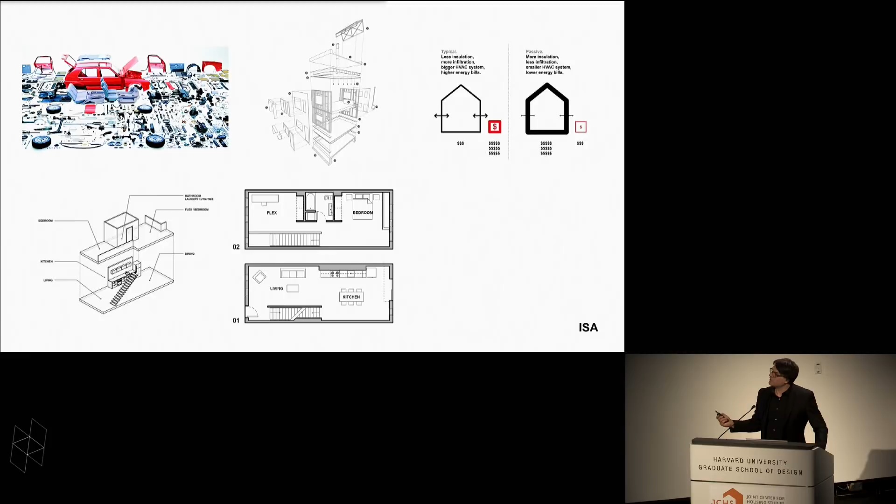Super energy efficient, which isn't going to be the point of my talk, but one of the things I just want to point out is this house had two doors, the bathroom door and the front door. And so this whole idea about are there new ways of thinking about housing that are small and simple that can control costs and frankly also create spaces that people want to live in.

And then we started to realize that Philadelphia is a funny town. It's got 440,000 row houses. No other city in America quite stacks up like this. Baltimore is sort of similar. There's this democracy of the grid where whether you're rich or poor, you probably live in a 16-foot wide house, which creates this common sort of challenge for living. And I think we're finding ways to exploit this.

So I'm going to take you through 3 different quick projects that talk about 3 different ways that we operate in this fabric. Just real quickly, Philadelphia lost a lot of population since 1950. It's on the rebound, resulted in a lot of vacant land. So that's part of what we're now working on. And one of the things we do is we infill single lots.

But one of the things we learned here was this idea that the outside of the house didn't have to be expensive. And in fact, on a row house block, the sidewalk in the street is actually the living room, and that this arms race for facade curb appeal on a lot of projects we're seeing is almost a misplaced investment. And so our idea with this was about core appeal, which was put the value of the house inside.

And for basically the price, actually a little under what a lot of people are building these starter homes for in this neighborhood, people are able to live in what feels like a very sort of generous space where the value is in the kitchen, and the bathrooms and the stairway, which is the stuff you touch as you live in the house. So just rethinking the way we're spending the money was a sort of lesson here.

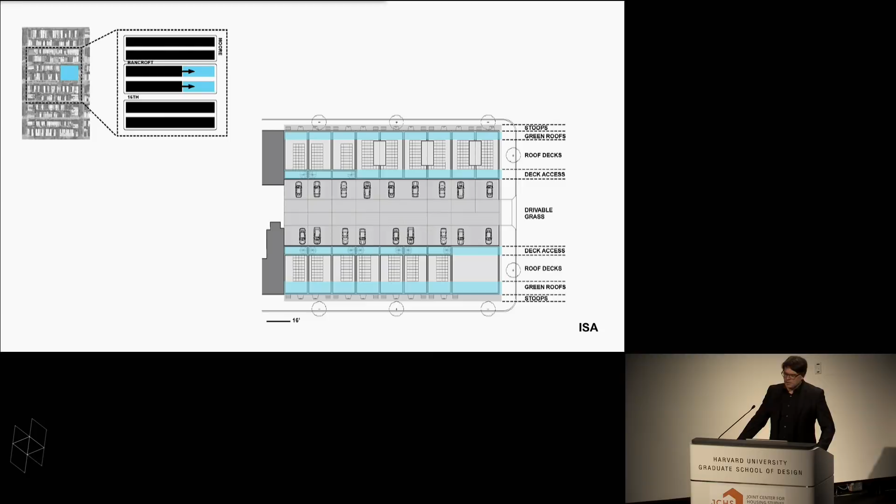The vacancy of Philadelphia sometimes results in big pieces that are missing. And this next project resulted from the demolition of an outmoded school. You can see here on the top left, basically the diagram was to continue the row house fabric. Sort of parking in the middle of the block. That was all turf paved, so it's also an outdoor recreation space.

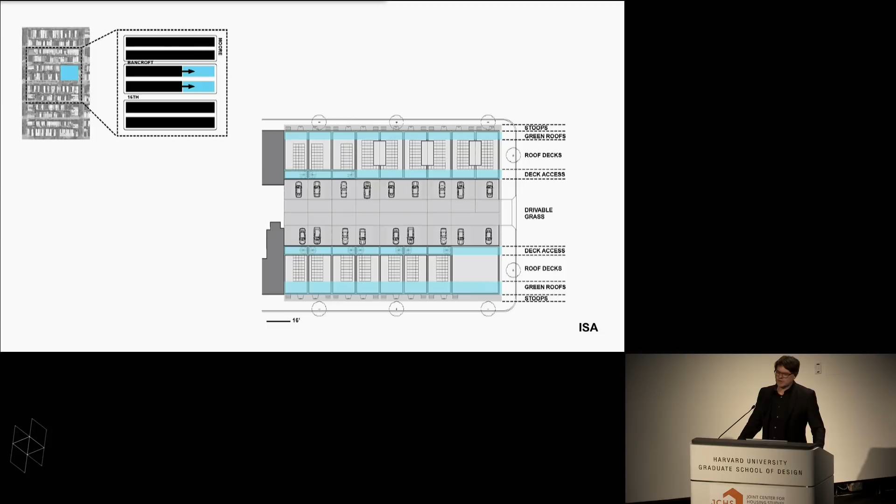But one of the things we've been using, if you think about this as 100K growing up as far as scale, this is a combination of condo flats, 3-story and 2-story houses. The 2-story houses sold in the upper 200s, which in this market was a pretty remarkable number. Still hitting about that $100 a square foot.

You can see the simplicity of, and I apologize for the sort of slightly blown out floor plans there with the contrast, but very simple cores, very simple interior layouts, and really hitting a kind of green performance level that is also putting some money back in people's pockets instead of to the utility company.

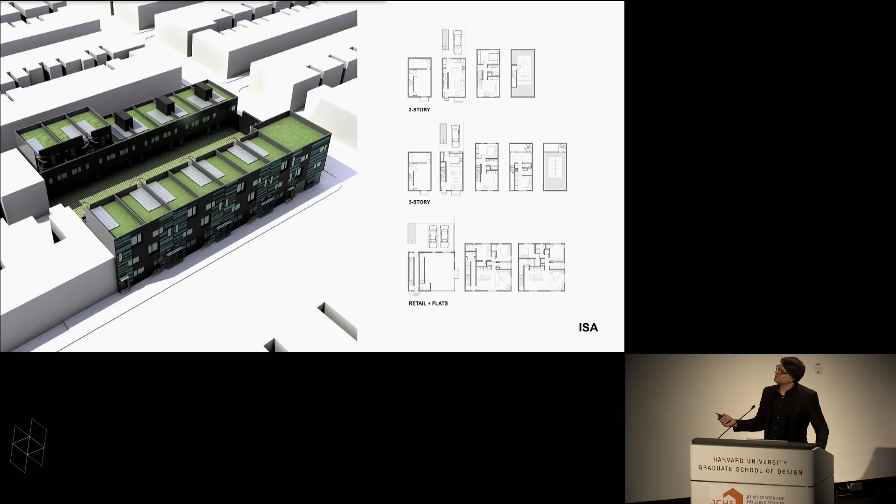But this developer was really struck. He was very worried about the cyan-colored facade, saying this was going to stick out in a funny way. And we said, no, trust us. It's South Philly. You'll never see it. And I think in a way it's kind of true. It actually created a kind of animation in the way that the existing houses do, and the neighbors were extremely embracing of it.

So this is my favorite category, the leftover category, and this is what happens as a market matures and all of the easy sites are gone. And now developers start turning back to what are the sites that are hard to develop. And I think this is a lesson we've been learning about how maybe the architect can unlock interesting value.

So this was a 20 by 100 foot lot under the elevated train, which I would say it's a corridor that 3 or 4 years ago was not a place most Philadelphians wanted to be after midnight. And the developer came to us and said, it's right on the train. I'm really worried about whether people are going to want to live here.

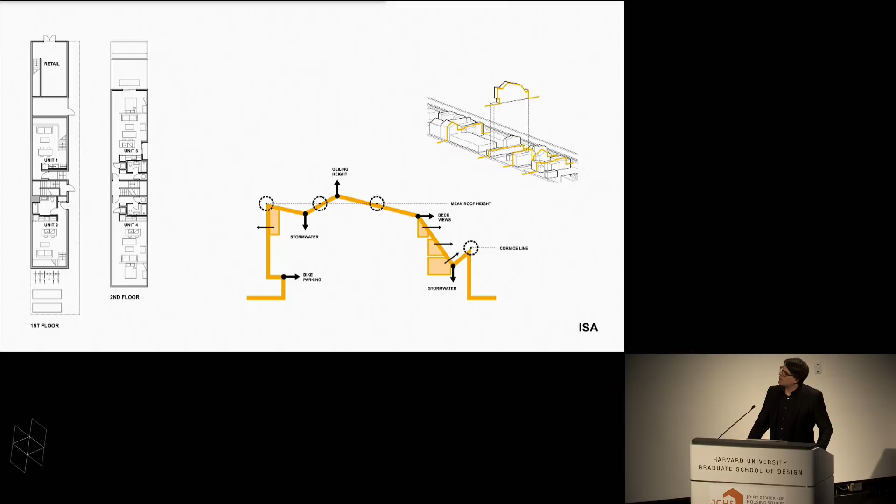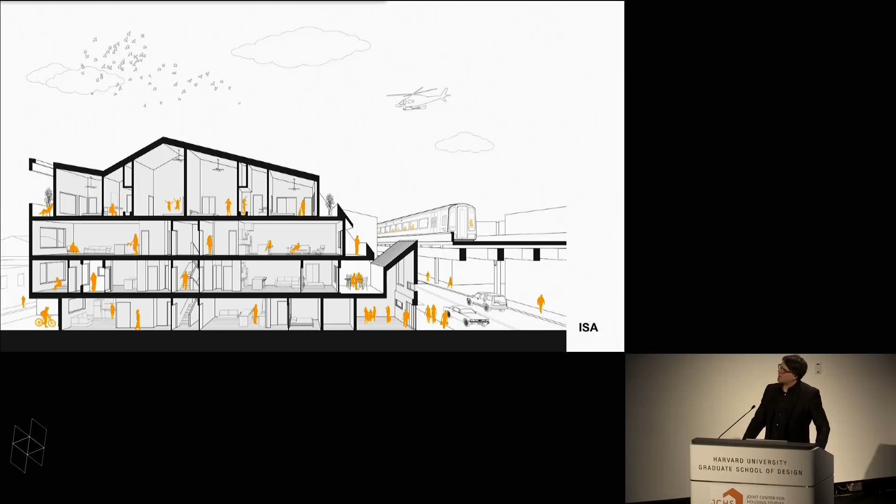And here you can kind of see the relationship to the train. And you can also see on that upper level, there are these sort of volume spaces that allow people to experience the roof line that is interesting and dynamic. And you can see the sort of terraces that are revealed - that's one on the back. You can see what it's like to be out front there looking at the train go by.

And we've now done a series of projects along the train that are frankly being built on pieces of land that are still affordable, finding ways to maximize the number of apartments and places to live on those lots. Not to make them feel marginalized, but frankly, this corridor, we do have a habit of gentrifying corridors a bit, in the sense that lots of people want to live on this corridor.

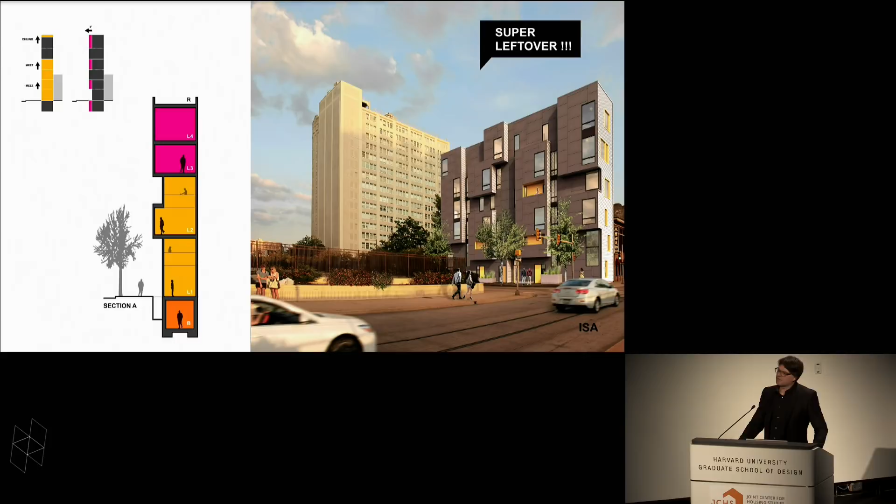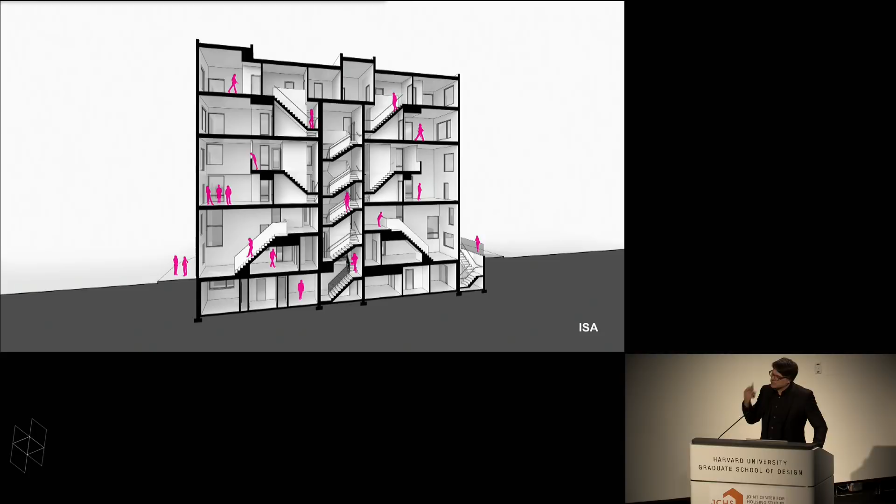I want to make 3 points about why I think Philadelphia is generating these projects. One of them is this idea of small batch development. I think one of the things we're going to hear about today is volume is important, and I think that's true. A lot of cities are tens of thousands of units behind on affordability.

But one of the things we're seeing is that small projects - both of these projects, the banker, the lawyer, the developer are all sitting at the table and everybody gets on board with the project we're doing. And the financing, there's not distance from the project on things like financing and some of the regulation, that everybody sort of gets on board, and I think that allows for some interesting risk.

We've also become really interested in this idea of what we're calling lab cities. It's interesting, we're working in Detroit and Chicago, and if you look at them statistically, they're sort of similar to Philadelphia. My last slide will sort of point this out, but I don't think cities sit in the lab zone forever. But I think when they're in the lab zone, it means they're just affordable enough, and we think that's a place where there can be innovation. And we're now looking for other cities where we can contribute to the way that they're unfolding.

I just saw the stop sign. I'm on my last slide.

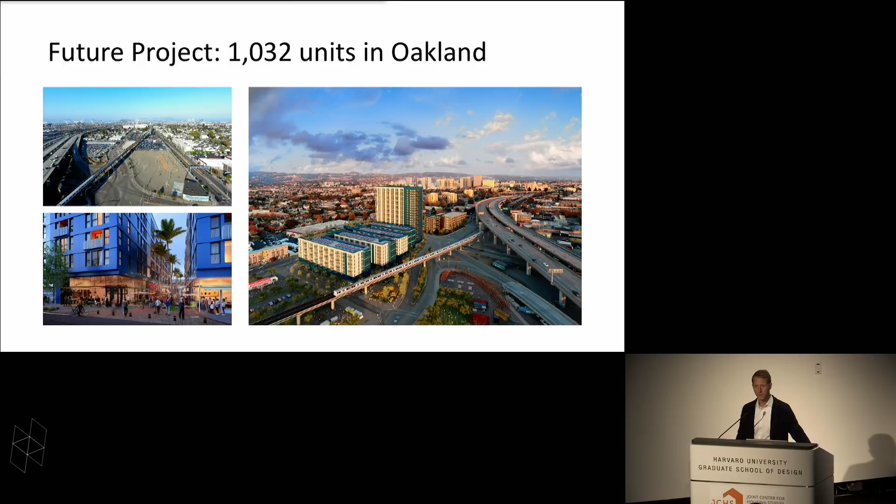So this will come as no surprise to the room. We have, in the Bay Area, added a little less than 700,000 jobs over the last 8 years. During that same stretch, we've added only 100,000 housing units. So there's this incredible shortfall of units, which leaves the regular civilians competing for housing with highly paid engineers working for Google.

Even the cartoon artists in town are recognizing the ridiculousness of the housing situation. On the left is how apartments have been used forever: 2 bedrooms, you get a couple roommates, a small family. Today, on the right, that's how they're being used. My personal favorite is the bed in the bathtub or the sleeping loft in the kitchen.

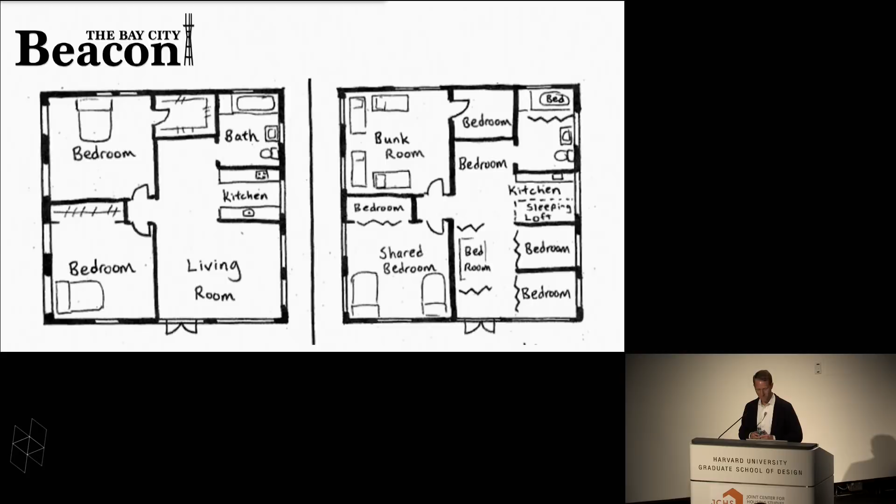But cramming more people into less space has been the market's response to affordability. Our solution and response is as follows: for us to continue to build housing that is affordable by design, it needs these 3 things.

The first one is building with no parking. Second, building with micro DNA. By that, I don't mean building teeny tiny studios, but having apartments that have the spirit of small. And third, having a standardized set of designs which can be adapted to be modular.

Next week, we are breaking ground on 200 units in San Francisco. We're going to have 650 residents, and we're going to have no parking spaces. The development immediately next door, similar in size, ended up building subterranean parking. We decided to build subterranean housing.

It costs us about $60,000 per space to build a single parking space. By not building any parking, we were able to add 17% more housing for humans.

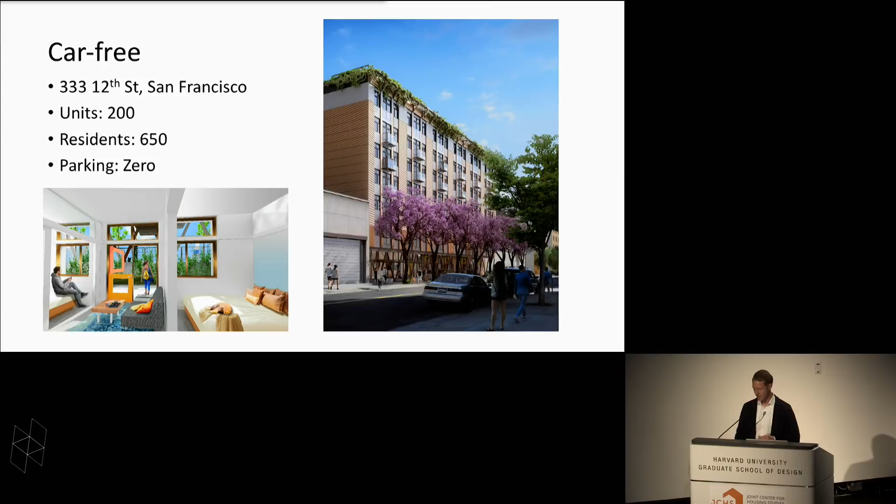I will say in San Francisco, it is no hardship not having a private car and a parking space. Most people that are moving to town are choosing not to have the headache of having a car. Certainly in the age of car share and bike share and scooter share, most people are choosing to not own the cow when they can just buy the milk.

The favored units in this building ended up being our 3-bedroom suites. Those units had the DNA and the spirit of a small studio, an efficient space, but we were able to have 3 bedrooms, a bathroom, a living room, a kitchen, all in less than 600 square feet.

Now, for us, it's important to have just enough common space outside of the apartment. So always having a nice rooftop deck, having reading rooms in the building, having a cafe on the ground floor. But once we get past those basics, we stop.

We don't do pools. We don't do gyms. We don't do doggy daycare in the buildings. In fact, in our office, we've banned the word amenity. We feel like the greatest amenity in San Francisco is price.

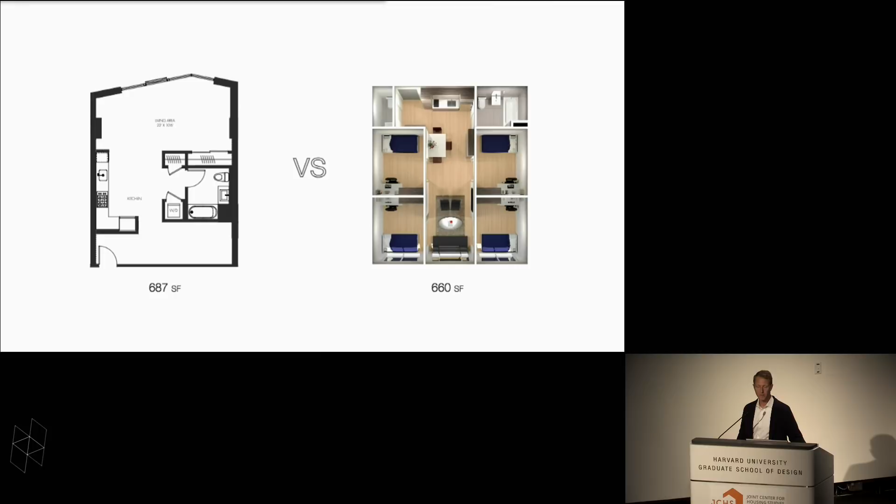In that same square footage, we've designed and are building 4-bedroom apartments.

Now, this is the last and my personal favorite component that has to go into housing for us to keep it affordable. My favorite cheeseburger place in California happens to be In-N-Out Burger. Has anybody else in this room been to In-N-Out Burger? Oh my gosh, this is amazing. So for those that have, you can appreciate the simplicity of the menu. They have a hamburger, a cheeseburger, and a double-double.

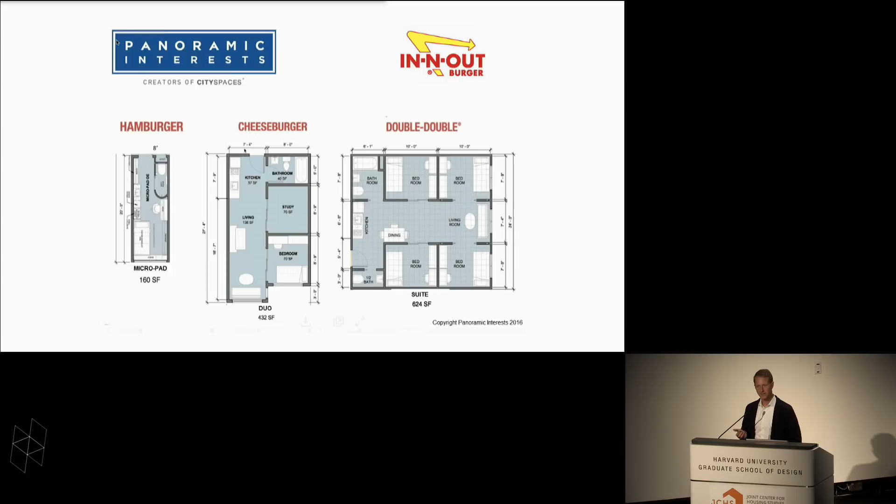For us, it's the studio, the 2-bedroom, and the 4-bedroom. Now you can order off-menu at In-N-Out. We are not allowing off-menu ordering. We're sticking to those 3 designs. But having this standardized set of designs has allowed us to build modular.

This was the first project that we built in 2013. It was our first modular project. Every unit was exactly the same as the next. We did not have a full catalog of various apartments.

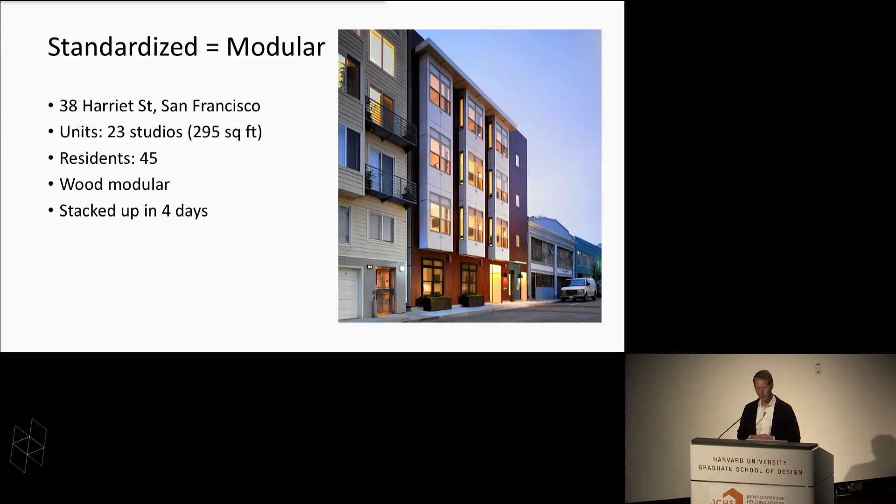We ended up constructing the boxes up in Sacramento and then drove them down over the Bay Bridge in 16 pieces and stacked them up over the course of 4 days. So this saved us almost 8 months in construction time.

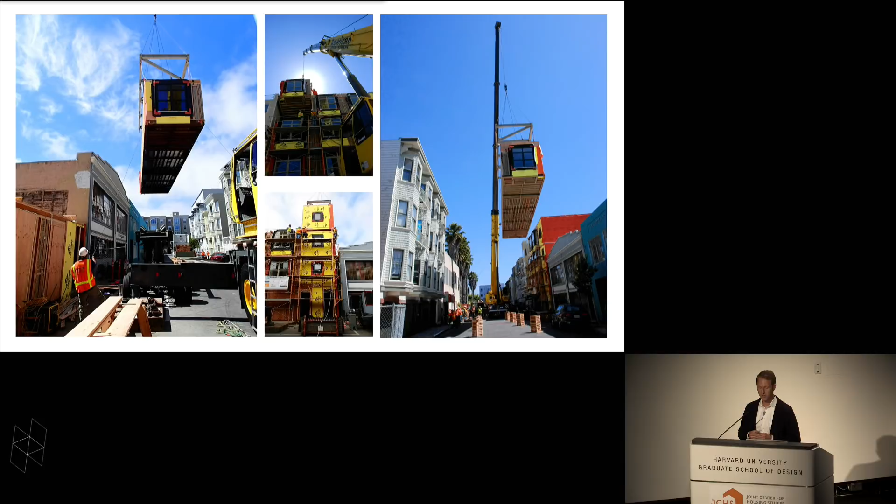Having that standardization has allowed us to create what we call the micropad. PAD stands for Prefab Affordable Dwelling. I actually have a little model of it here, which I'll leave on the table afterwards. It is uniformly 8 feet wide.

We make these off-site, and then we bring them to the construction site on a traditional 18-wheeler, or it can come on a train or a boat. But using this construction technology is identical to the technology used in making shipping containers.

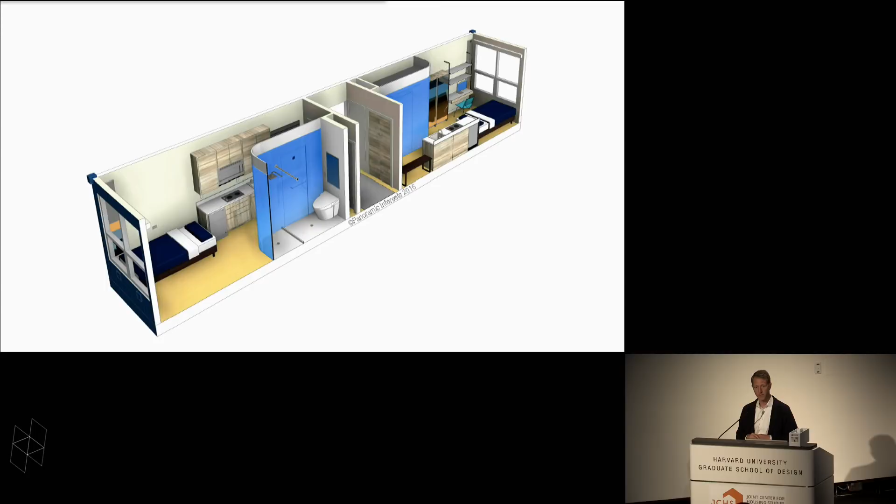Once they're brought to the site, they get stacked up just like Lego blocks. We can erect a 6-story building in less than a week.

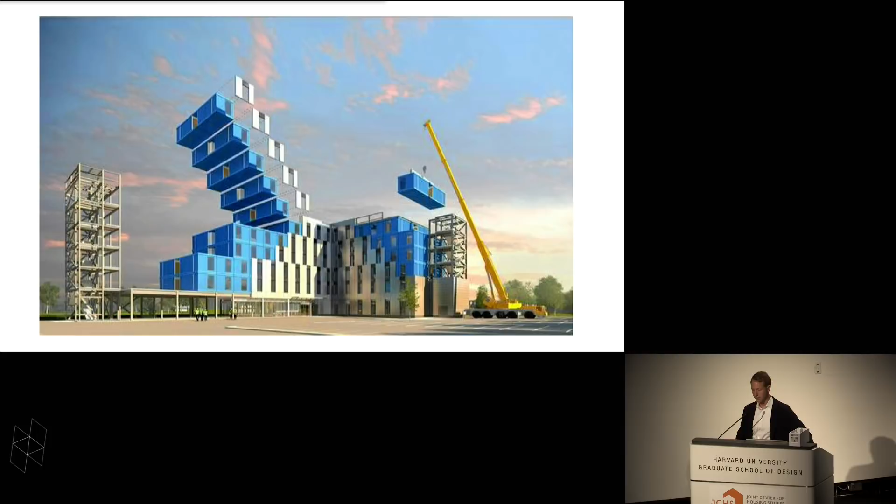We did actually build a prototype of this. It is small. It's only 160 square feet, but we feel like it's very suited for single butchers or bakers or candlestick makers. We did recently submit a planning submittal to build our first micropad building in San Francisco. It's going to be a 5-story building and likely will be leased by a school.

We do feel like, though, developments of this size, small developments that are using modular technology, are very well suited for building supportive housing for the homeless. And that's something we've been looking into a lot over the last 1.5 years.

I don't know enough about Boston's homeless situation, but I will say in San Francisco it is at crisis level. By having a standardized design using modular technology, we feel that there is a potential to make a real material impact on homelessness.

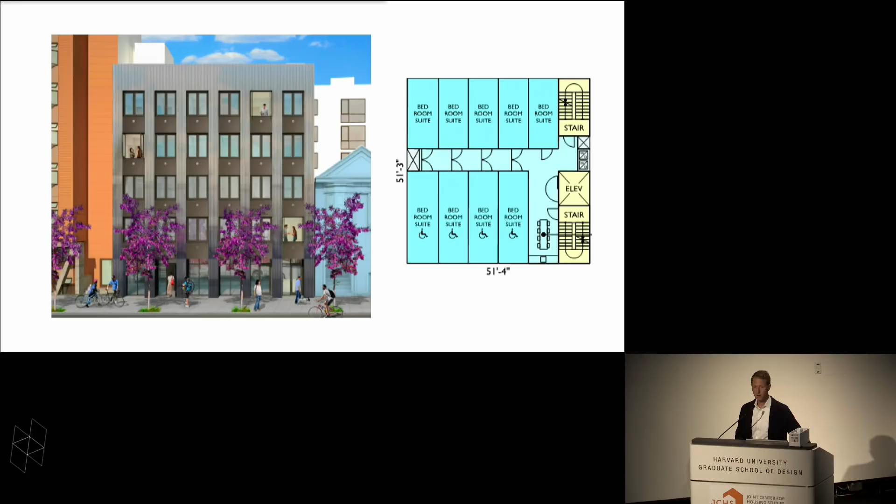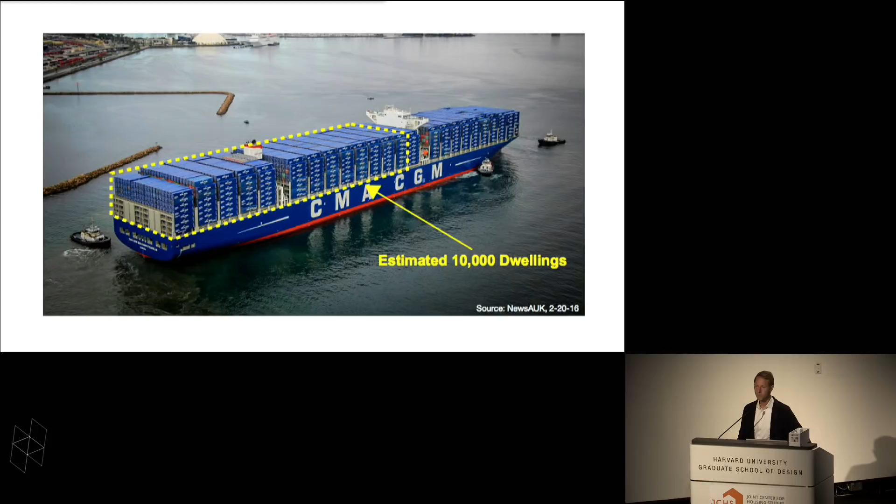I'm happy to be here today. Thanks for listening.

Hello? Okay. So you're trying to silence the rural interloper, huh? I got you. Okay.

I'm Andrew Freear. This is where I live. It's Newbern in West Alabama, population of 178 folks, which is about half the size of this conference. I...

run Rural Studio, a small undergraduate architectural design and build program that's part of Auburn University. The program has operated in West Alabama for 25 years, and for my sins, I've been there for 18 years. With our community, we design and build homes, parks, and public facilities.

At the tail end of the Appalachians, it's one of those rural areas with persistent poverty. Hale County has about 27% of folks living below the poverty line, and perhaps most shockingly, our neighboring county has childhood poverty of over 50%.

Like the Delta and the Colonias, this part of the Appalachians has always had extraction industries. So a lot is taken away, but little is given back.

Much of the land is owned by folks who don't live there. So when we try to raise taxes to support education, their powerful lobbyists frighten everyone into believing that even the smallest tax increase will be the end of the world.

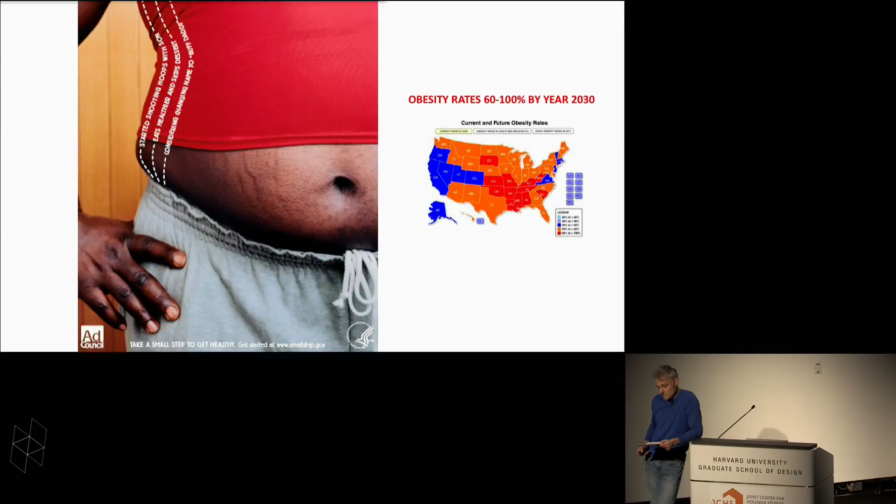So for the studio, housing is a Trojan horse for a whole lot of issues. Jobs being number one. If you don't have a job, you can't own a home, and you can't stay in your community. The type of job is also important.

There's a need, we need more than poverty-level service sector jobs. So 13 years ago, we started to look at a small site-built home. We imagined it being dignified, beautiful, and affordable, whilst encouraging folks to live within their means. The main goal was raising the quality of rural housing and offering an equitable product, and most importantly, it's locally built, so the money and the jobs stay in the local economy.

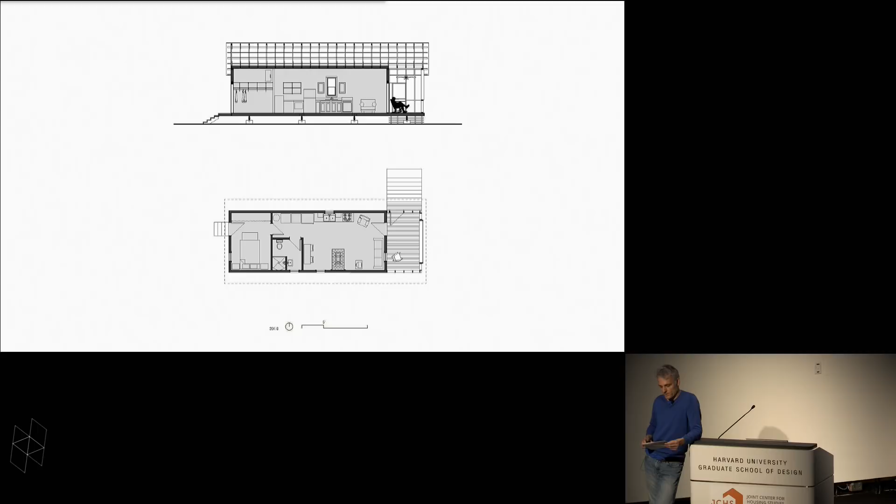We use zoned areas for ease of heating and cooling to attempt to control utility bills. And our challenge is 5 windows and 2 doors. We use deep reveals around windows to make them look bigger and to bounce light into the space. We use 9-foot ceilings for drywall efficiency and ceiling fans to help cross-ventilation.

Let me read this again. Excuse me, I'm not used to reading this, so I want to stick within the time limit. And she's already pulling me off stage. Where the hell am I?

Simple math shows that for the same amount of wall, the geometry of a square plan, unless you take a circle which is really difficult, gains you more interior square footage over a rectangular footprint. It's an efficient plan with little circulation.

We care about things like the position of the refrigerator, in this case bouncing light off its face into the kitchen. We're working on the 2-bedroom version and questions of larger communal spaces and where to locate the bedrooms. In this case we gang them together, but it makes the house wider and less easy to build. It's fun to watch how folks live in the houses.

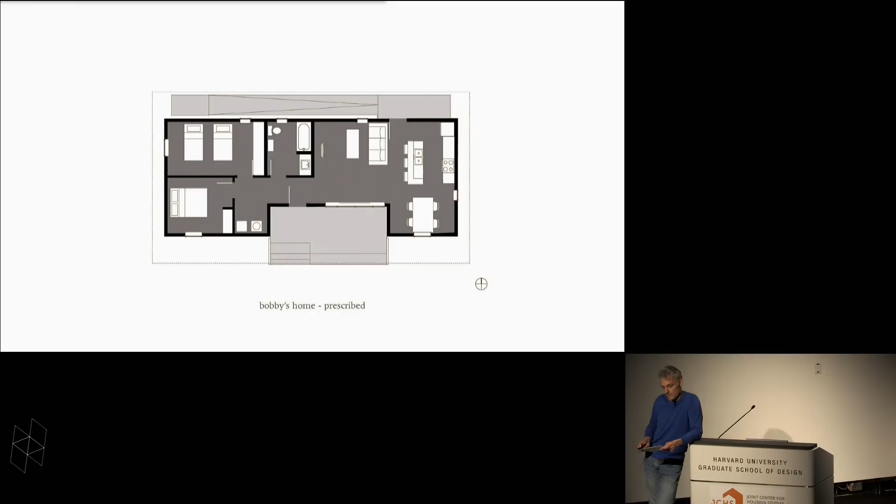A breakfast bar seemed like a good idea for us liberal designers. It's a place to imagine sipping your gin and tonic. You can see it over here. The reality, of course, is very different. The great, ugly American sofa ends up sitting at the bar.

As we've gotten into the project, particularly with the 2 and 3 bedrooms and the associated family expectations, we've started to identify resources - not only the local labor or materials, but also the kinship networks that exist. These folks live with very little, and frankly it's the only way they can survive. There's little or no evidence of homelessness. We have kinship and community that you city folks strive for. So we work very hard not to damage these fragile networks by seeing the 20Ks as replacement homes.

In this example, Adela, who is wheelchair-bound, lives in a shack and could literally not get in or out of the house. We replaced it with an ADA-accessible slab-on-grade 2-bedroom. Her daughter Michelle, her primary caregiver, lived in the crappy trailer behind it. We were able to replace Michelle's trailer by building right next to it and pulling the trailer out when the house was finished. The goal was to keep the family together and leverage the existing water and waste connections.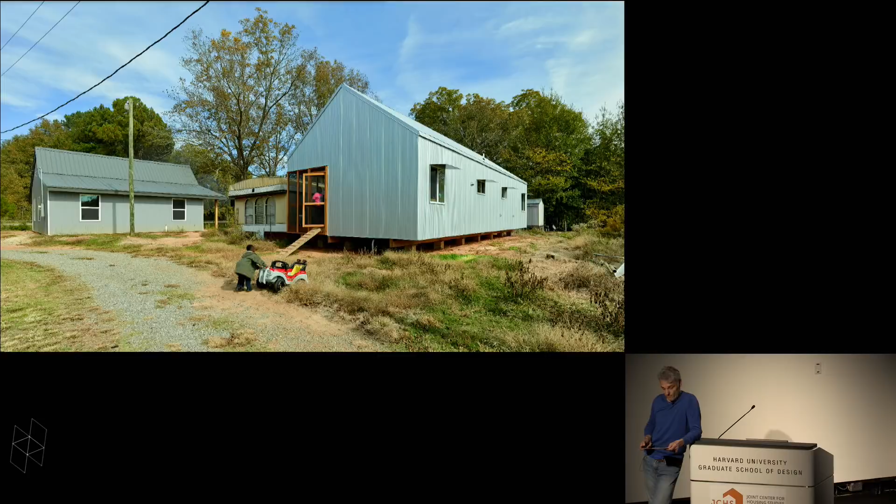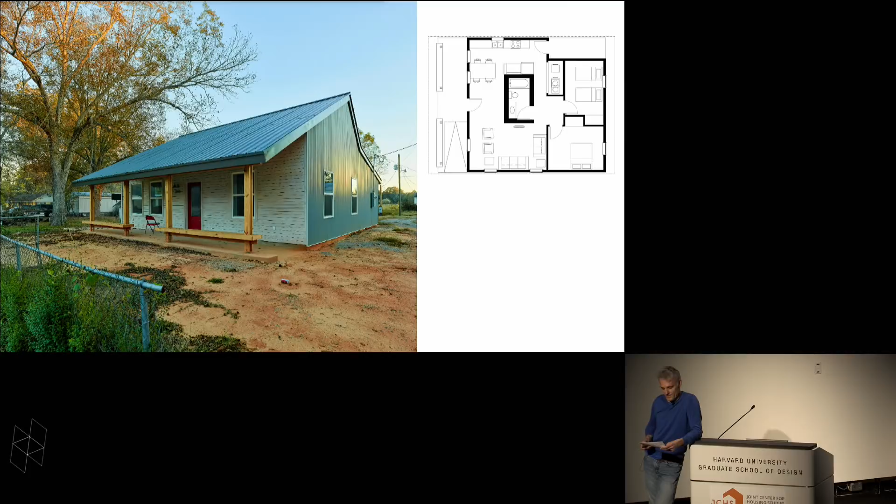In Adela's house, we made the bathroom a tornado shelter, not only for wheelchair-bound Adela, but for the 12 members of the family living on the property, who will all squeeze into the shelter in case of a real emergency. Moving forward, we're looking at shifting the monthly burn.

In targeting the operating costs of the house, we're looking to reduce and shift them into the fixed known costs of the mortgage. We believe for every dollar we can save in operating costs, we can add $200 to the mortgage.

For example, in examining our wall assemblies, where we compared our current baseline of 2x6 studs, unfaced insulation, and OSB with other options, we looked at the monthly utility costs of the assembly, the upfront costs, assessed the minimum required saving, and the savings over the life of the loan. Ultimately we came up with a revised choice that represents best value versus our baseline option, potentially saving $2 on the monthly burn and offering a potential extra $400 in the mortgage, and indirectly raising the market value of the home by using higher quality materials.

And of course, we can do this for all the assemblies, and the same thing with home insurance. If we build the house to fortified construction standards, we can save 20 to 50% off our monthly burn, which can add a whopping $4,000 if we move that monthly saving into the mortgage.

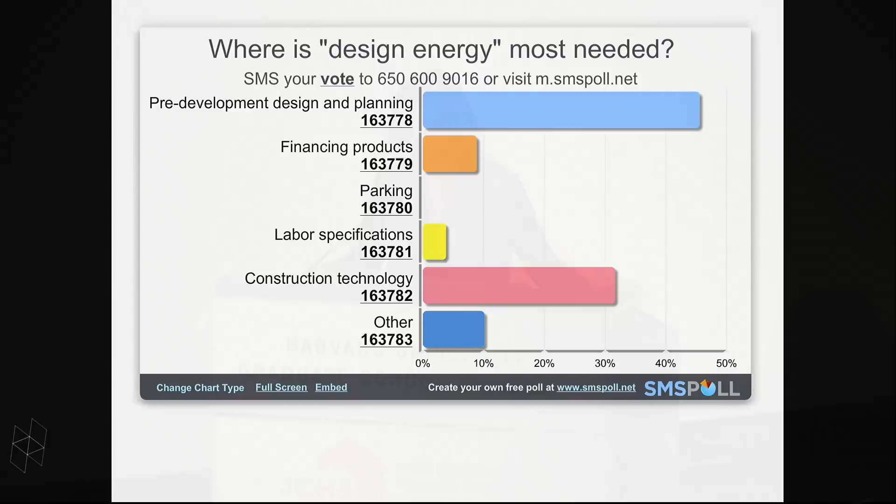Thank you. Okay, folks, we're gonna come back together. So far, I would say, to the Joint Center team, bravo, success. You got an incredible conversation going. And I want to really just say bravo to the three panelists.

Incredible presentations. I want to ask the first question. I personally am feeling incredibly optimistic, like, wow, okay, maybe we can do this thing. So I want to ask the first question, really two parts. One, what part of this equation have you not solved? And then, from a design and construction perspective, perhaps you've created some really excellent solutions. What do you need from our colleagues in the policy and finance sector to be able to amplify your efforts?

Who's going big first here? That was, by the way, too many questions all at once. Okay, what have you not solved? What's your next question, Michael? Okay, so we have not solved the exact place to put the dish rack on the counter in the kitchen. It's truly a dilemma in a small space.

One of the things we have not solved is how to get around or collaborate with labor in our market, where we're going to be building using off-site modular technology. It's something that doesn't exist everywhere in the country, but in the Bay Area, labor is having a problem with off-site construction. That's something I think is going to take time to get through. But we, as a small private development company, have not solved that yet.